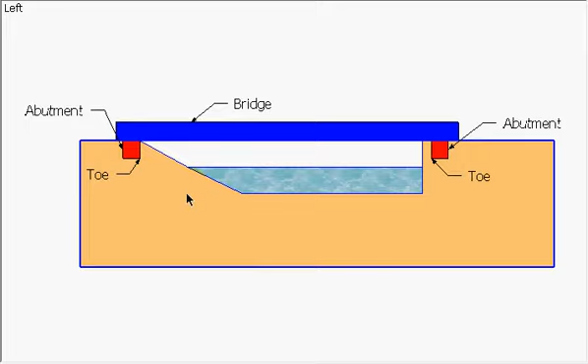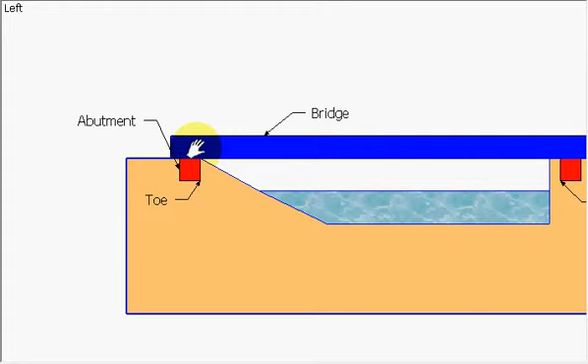Hello, in this video I want to talk a little bit about bridge abutments, particularly the toe of the abutments. You can see my model here. I have a pretty basic site, vertical banks on one side, nice slope on the other side. But in both cases, what I want to talk about is the placement of the bottom of the abutment and what to look for. When placing the top of the abutment, there's other considerations, but in this video I just want to talk about the toe.

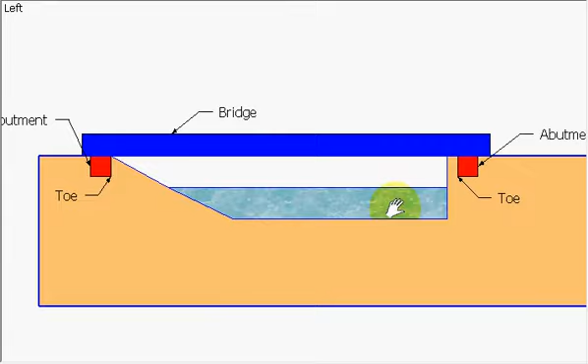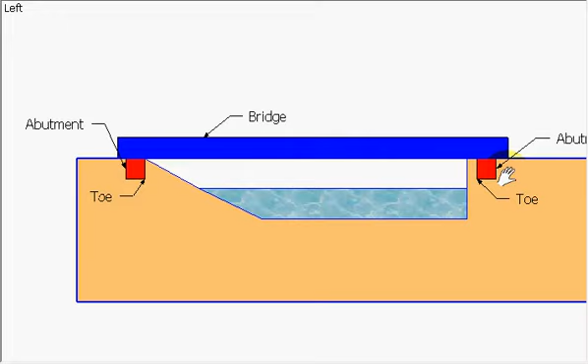You can see here the toe is the bottom edge closest to the waterway. Okay, so the toe would be here in this abutment, and the abutment on the other side will be right here. Okay, and what I have drawn here is a pretty simple spread footer cast in place. This would be the same thing. The toe is the same place regardless if it's a cast in place or our precast.

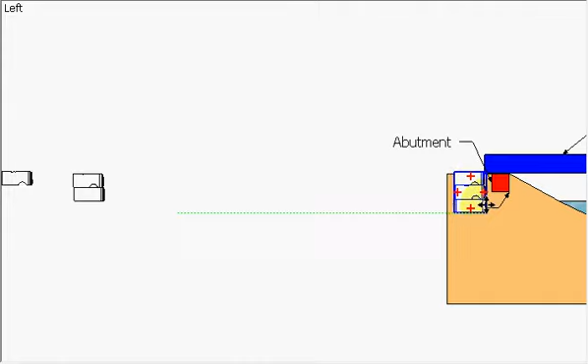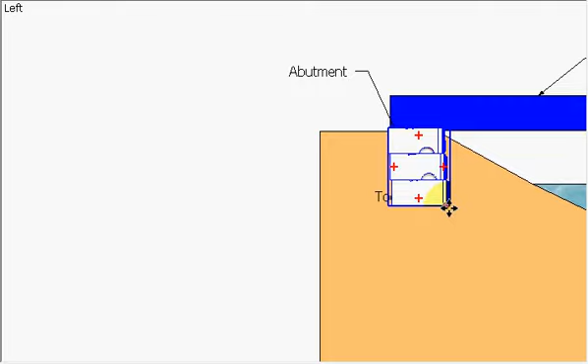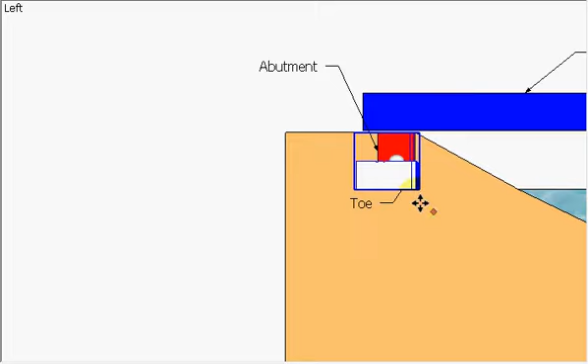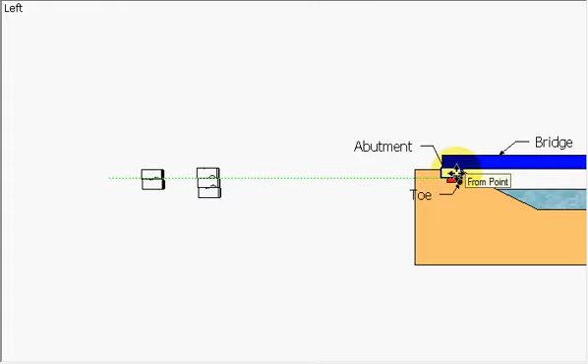Our precast, if I bring this over and set that here, the toe in this particular case would be right here. That's not the toe, that's not the toe. The toe is right here, the very bottom of the abutment. So same thing, if we're using the smaller package, bring this over, our toe is right here. And in the last example I have over here, our smallest abutment, our toe would be right here now. Okay,

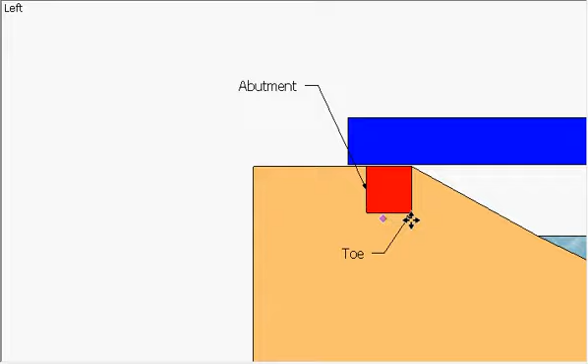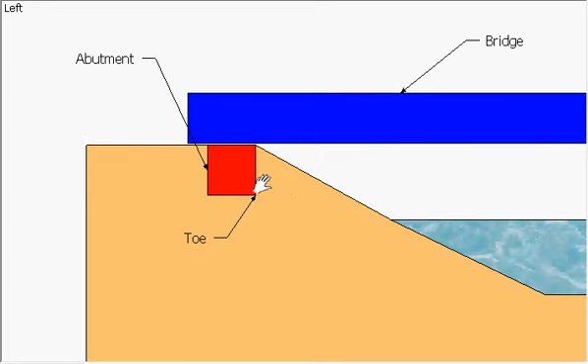so let's talk a little bit about where to put the bottom of the abutment or how to protect that toe. And this is pretty general stuff. You may want to consult a soils engineer or a hydraulic engineer to get more details about your specific site. But I just want to let you know how I try to place abutments whenever we're designing and building and putting these bridges together. You basically want this toe protected by 2 foot of soil or rock or anything. You want it protected by 2 foot of something substantial to daylight.

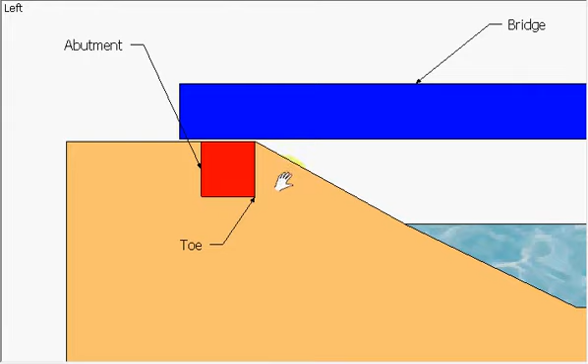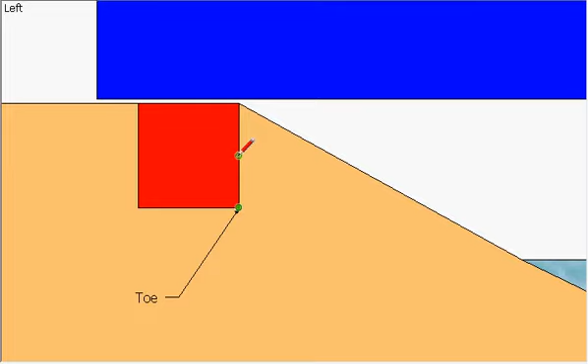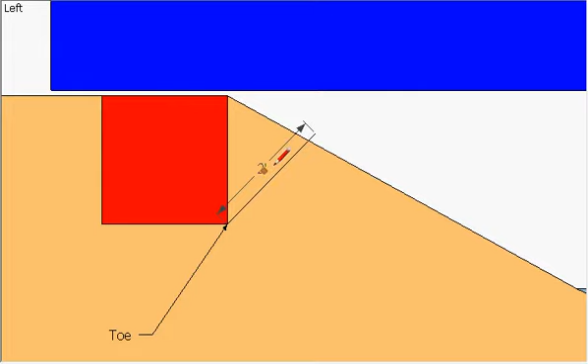Okay, and how I typically draw that is like this. It's a diagonal 2 foot. So what I'm going to do is go out 45 degrees. Okay, that's where we want to be. So that measurement here should be 2 foot exactly. So we have 2 foot there. Okay. Just to help you see this, I will make this into just like a little triangle here. That way you can kind of see what this looks like. I'll color this yellow. That way you can see this is just a tool that I use.

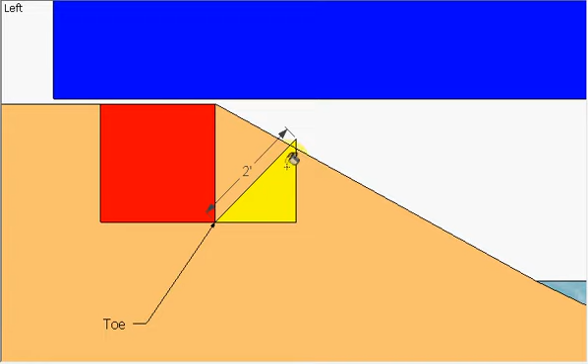The red is the abutment, the blue obviously is the bridge. In this particular case, you can see that our abutment is not protected by 2 foot of soil. So in this particular case, we would need to move our abutment back just a little bit right there in order for that to be considered a good placement for that abutment. Alternatively, let's say we absolutely needed it right there. For whatever reason, we need the abutment sitting right there. Well, there's a few different things we can do.

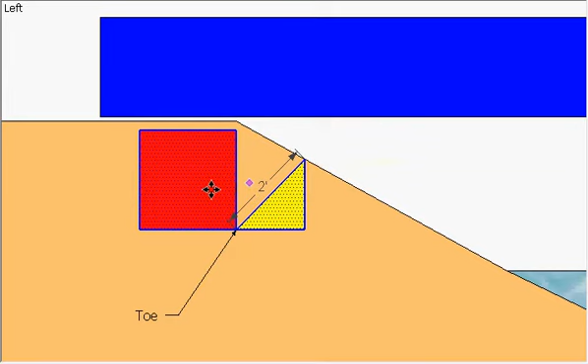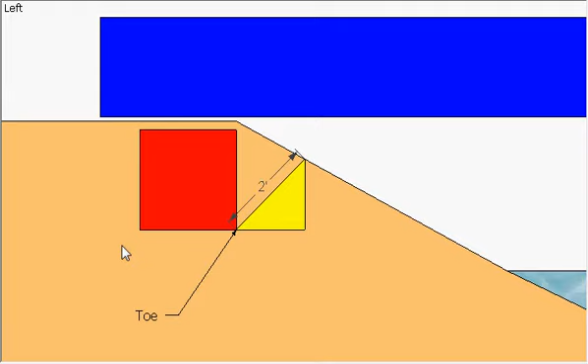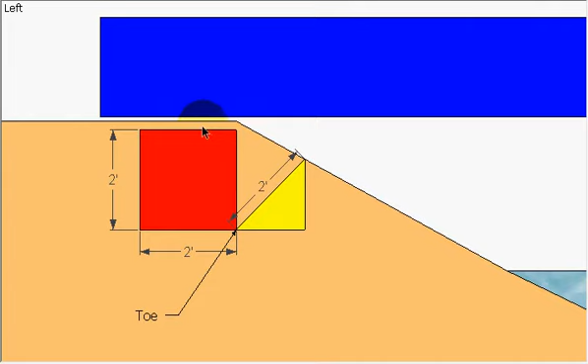Obviously, the easiest is take our abutment and just move it down a little bit. Okay, that means the top of our abutment will need to go up just a little bit. So we just have a slightly deeper abutment. If you want to know what the measurements are in this particular case, this abutment is 2 foot by 2 foot. Okay, that's a pretty typical abutment. But in this scenario, if we're at that slope, we would need to move this up. Now we're 2 foot 2 inches. So really, we're not talking a lot of extra concrete there.

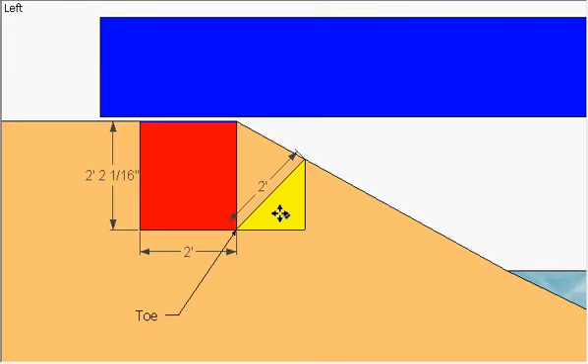But if we want to move the abutment a little bit closer, let's say we wanted it over here, obviously we'll just need to make the abutment a little bit deeper. And now they'll need to go up to there. Okay. So the closer we get, the deeper our abutment needs to be.

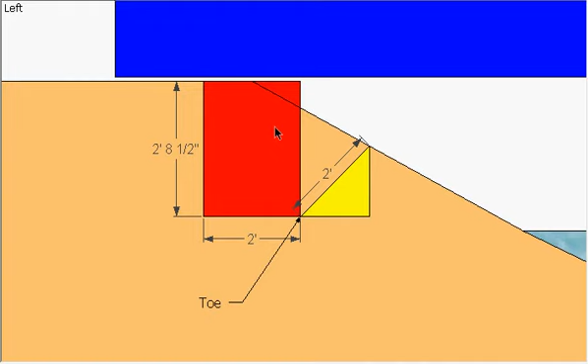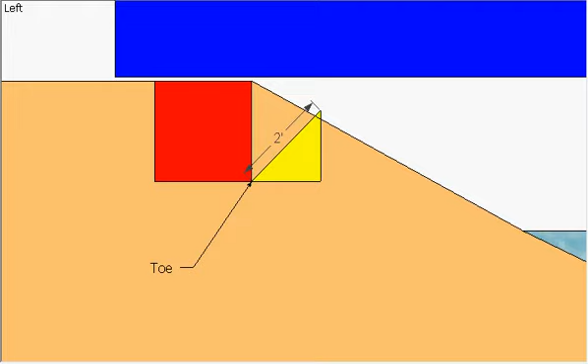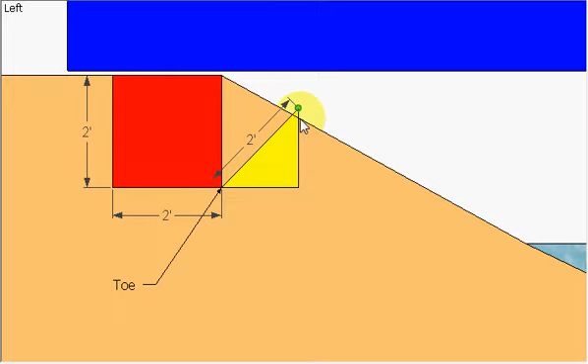The alternative, let me take a few steps back. Let's say we absolutely didn't want to increase the abutment depth. Let's say we're using our precast blocks and we have a predefined measurement and we really don't want to dig any deeper. What we can do is, since we're only talking a small distance here, heck, in this particular case, we're only talking, that's less than 2 inches there. What we could do is just fill that up and protect it with some riprap.

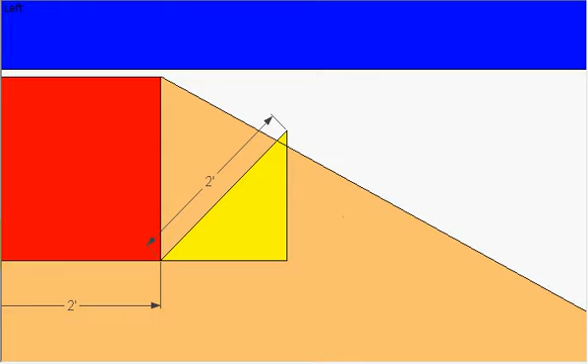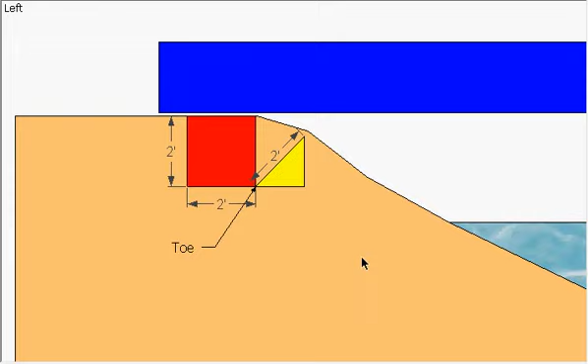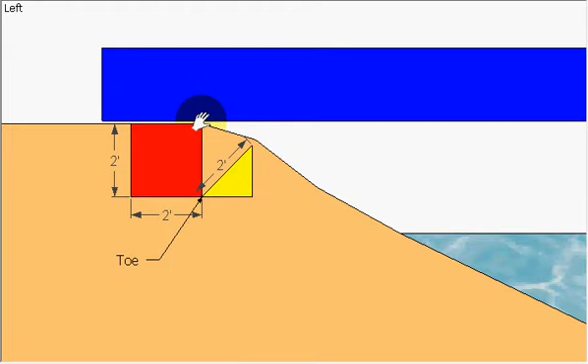So what that would look like is we would just take some riprap from the very top here and just cover the soil, cover that point up by a few inches, and let's do something like that. And that would be protected with soil. So now our banks would look kind of like that. Now that would work. That's a perfectly acceptable abutment. Obviously, you want to be careful with your slope and make sure whatever you put here doesn't just get washed down and get in the waterway. But that's a pretty simple way of doing it as well, slightly modifying your banks.

Let me change the abutment a little bit. Let's take a few steps back and put our abutment back the way it was. Now let's say our abutment is a lot steeper, it actually looks more like... let's say our banks look more like this.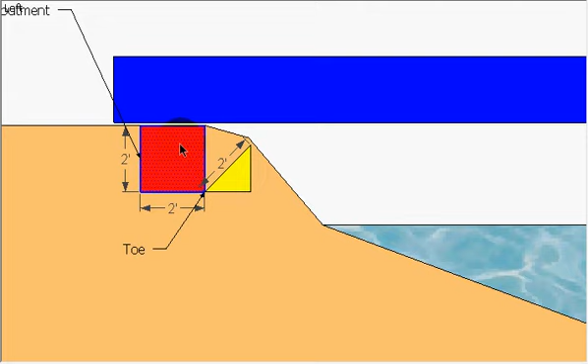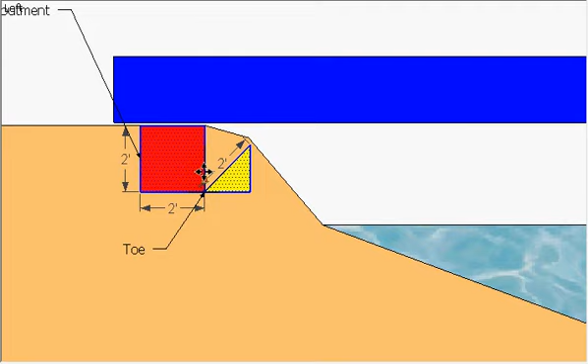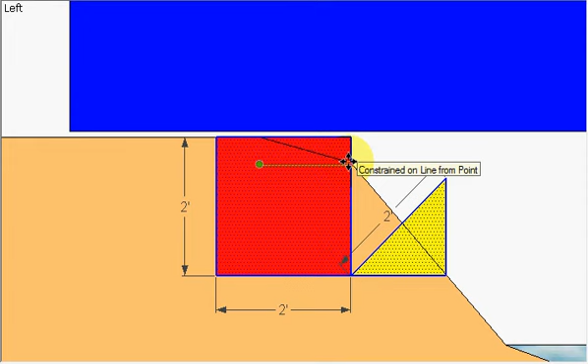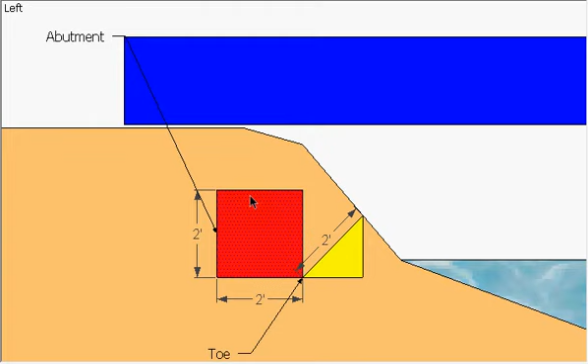Now let's say you wanted to put the very edge of the abutment right here. Same general principle. Let's say our controlling factor is we absolutely want this abutment right here, or even closer, right at that edge. We'd just need to push the bottom down right there, and then build our abutment taller. That's pretty simple.

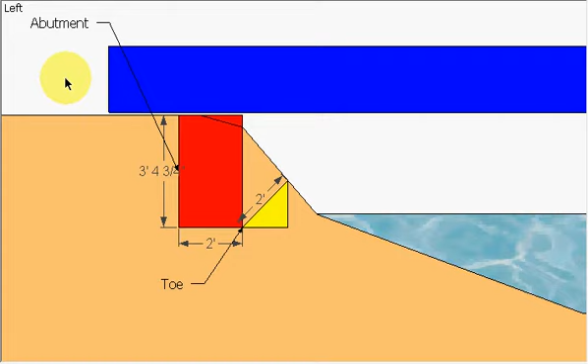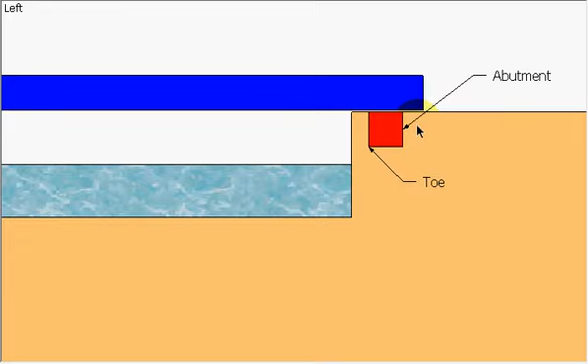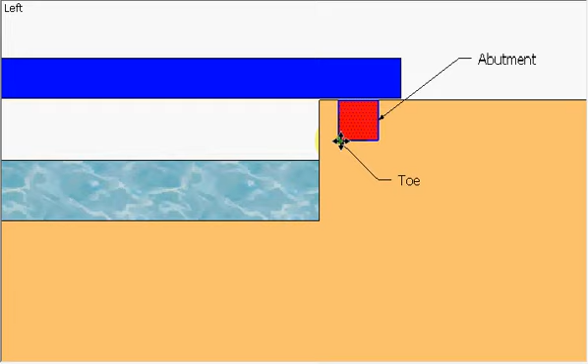That's a good slope right there. When you start getting into these banks on this side, same general principle, but you want to make sure you have enough good soil there so it doesn't just topple over, especially once you start excavating this trench for the abutment, which will make this a bit unstable. In this case, you really want to be as far out as possible, or alternatively, go as deep as possible.

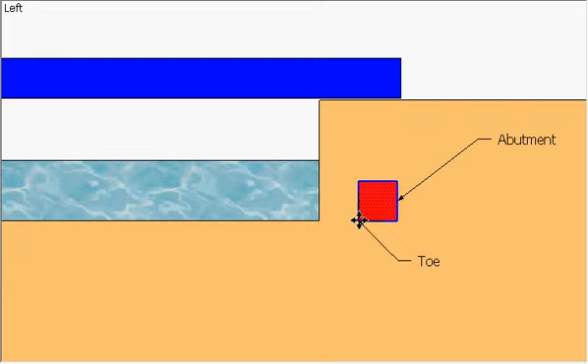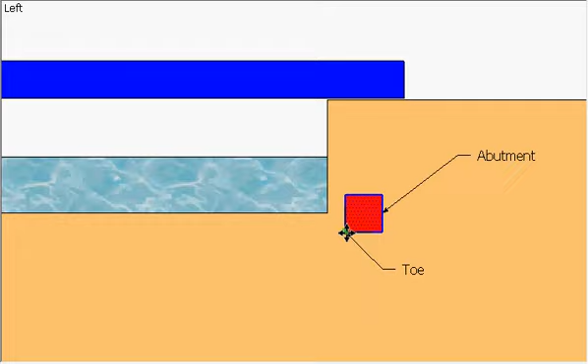If we're getting real close to this bank, we typically want to protect that toe with 2 feet, but now we want that below the waterway—about 1.5 feet below it. That way we don't have so much concern with water undermining this abutment. Our biggest concern is when the water flows through here, we don't want this thing churning up.

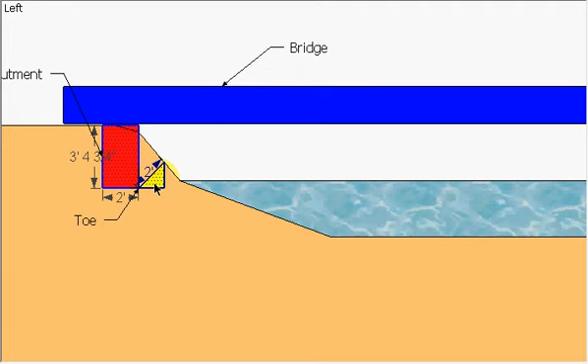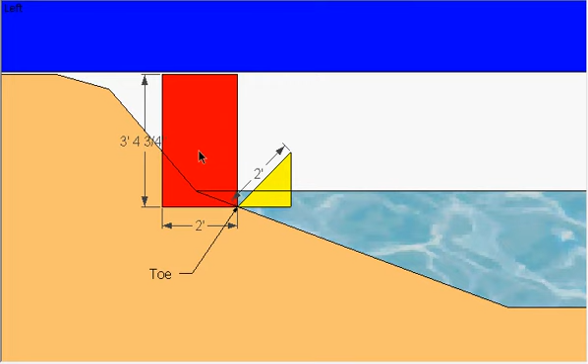Let's move this over here. You can imagine if we had it at the very edge, when the water flows through here it would just churn up that abutment, and eventually it would want to topple and fall right in. It would become unstable at the toe—the toe wouldn't be supported, and the whole thing would topple over.

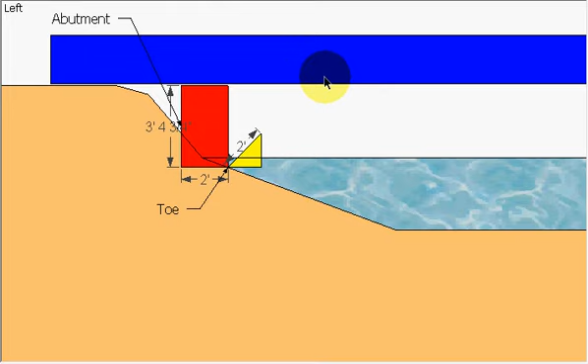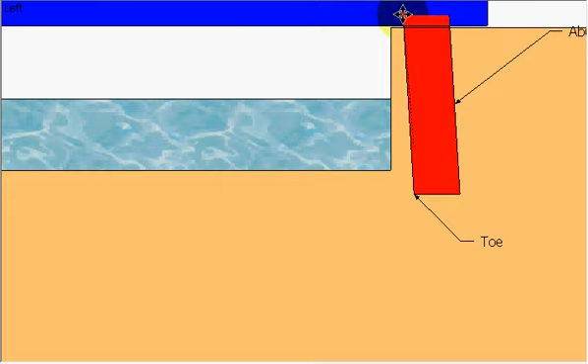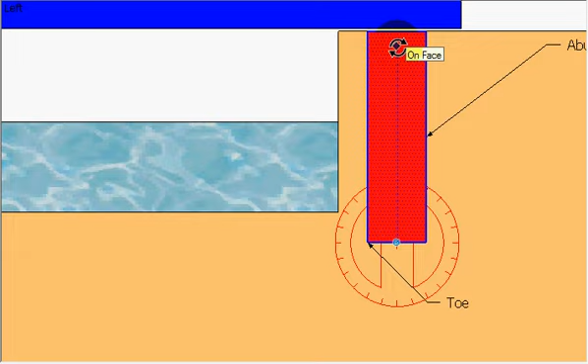So on this side, same thing—we don't want that abutment to topple over. Let me build this a little bit taller. That does become a bit tall, but sometimes if you can't push your abutment back, you need to go pretty deep. We can do the same thing here with our precast, but our concern is with the abutment toppling over back this way.

I'm not so concerned about the abutments going this way. We are very concerned about the abutments falling in this way, because water might start undermining this area right over that toe, cutting that toe.

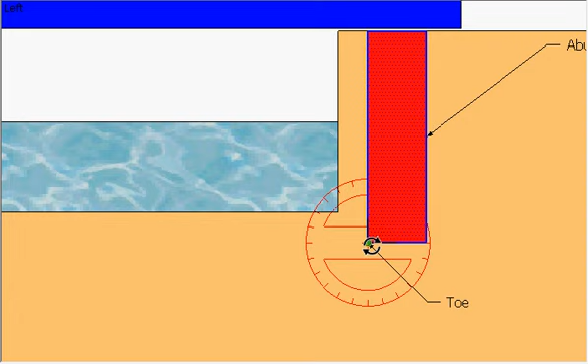And that's all there really is to it. As always, you should consult a civil engineer, a structural engineer, or a hydraulic engineer—or all of them—and get their opinion on what they recommend.

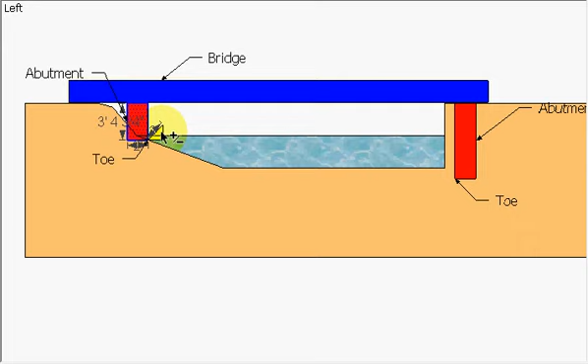What I do is based on decent soil, 1500 PSF, no large alluvial clays or anything that needs to be excavated. Sometimes when we dig this, even when we're protecting our abutment properly, let's move this all the way back in here so we've got this proper. If we start digging and find a lot of really poor soils underneath the abutment, we will over-excavate and fill that in with good road base or gravel.

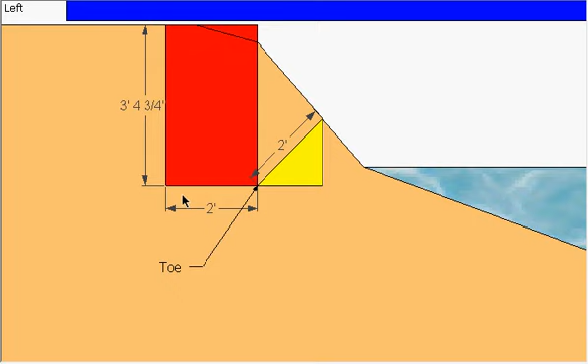That way, we don't worry about that abutment toppling over—not because of water, but because of poor soils. If you had a large clay deposit here, this thing could start moving on that clay as well, and we'd have problems. But you really don't know that until you start excavating, or unless you get a soils report where they drill down and tell you what that soil looks like. Even then, the soils engineer will recommend being on site to verify soil conditions.

So when you start digging, you may have to over-excavate a little bit. It doesn't happen too terribly often—maybe 20 or 30% of the time we have to over-excavate, maybe a foot or so, remove some of that bad soil, and then fill this area up with gravel. That's all. Thanks.